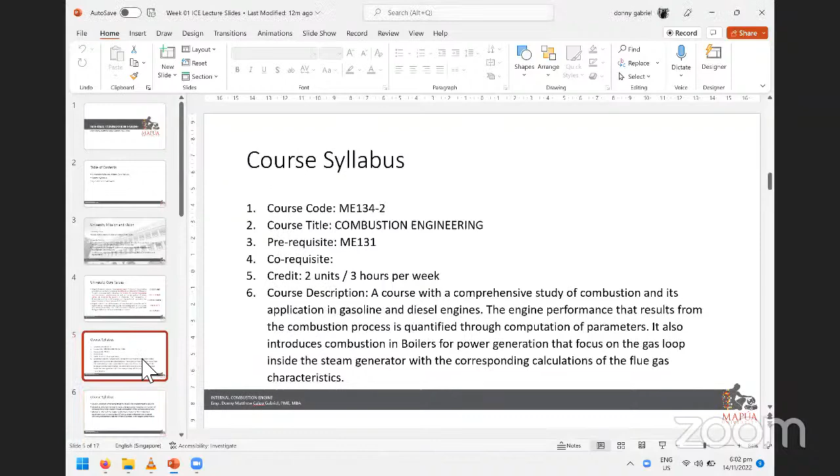Okay, so this is our syllabus. For 11 weeks, this will be our program. These are the topics that we're going to have. On week 5, we will have our module exam.

And also week 10. So week 5 and week 10 are our exams. The others will be just homeworks. Okay? Week 11, we'll just close out. So any other items we may have missed during the term, we will settle them all on week 11.

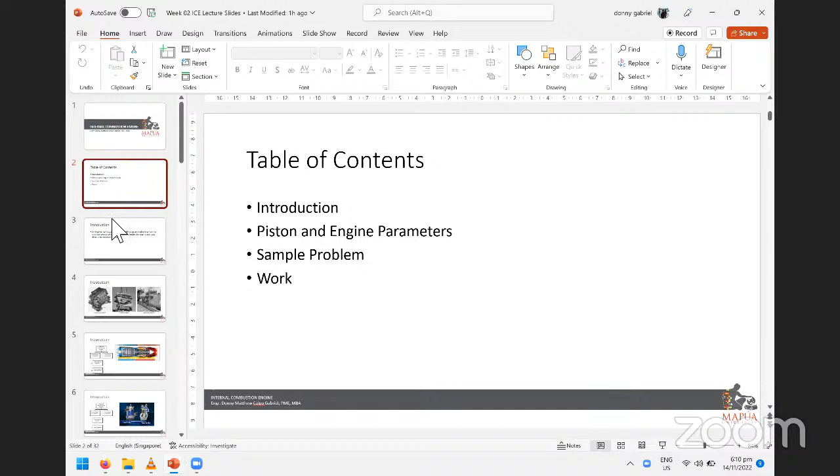So again, this subject is the internal combustion engine. An internal combustion engine is defined as an engine in which the chemical energy of fuel is released inside the engine. So there's a chemical reaction inside the engine, and that reaction produces energy, which is harnessed and used directly for mechanical work. That's the definition of an internal combustion engine.

There are also external combustion engines, but what we're focusing on is internal. Another example of external combustion is the steam train. Those are external combustion engines. But for our point of study, we will be looking at internal combustion engines.

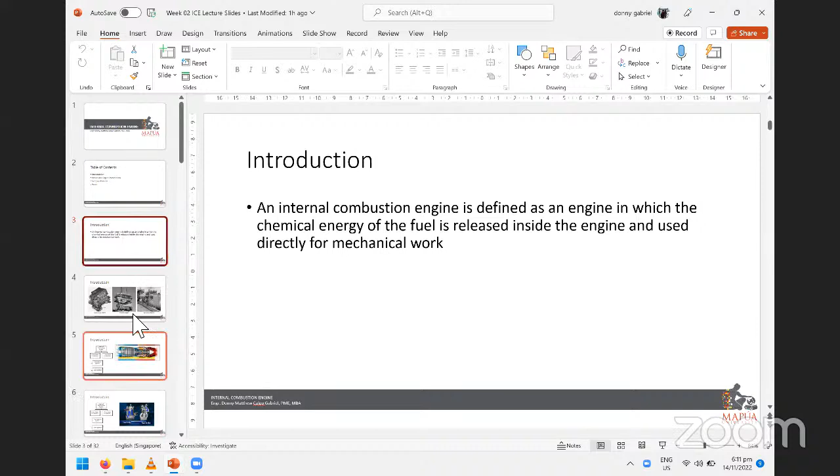Internal combustion engines are usually seen in automotive applications, so our cars still mostly use internal combustion engines now. Although we are shifting to a different mode of engine, right now it's still mostly internal combustion engines. We would also see these engines in ships, so marine engines, and also in generators, like in buildings—the large generators used there are internal combustion engines as well.

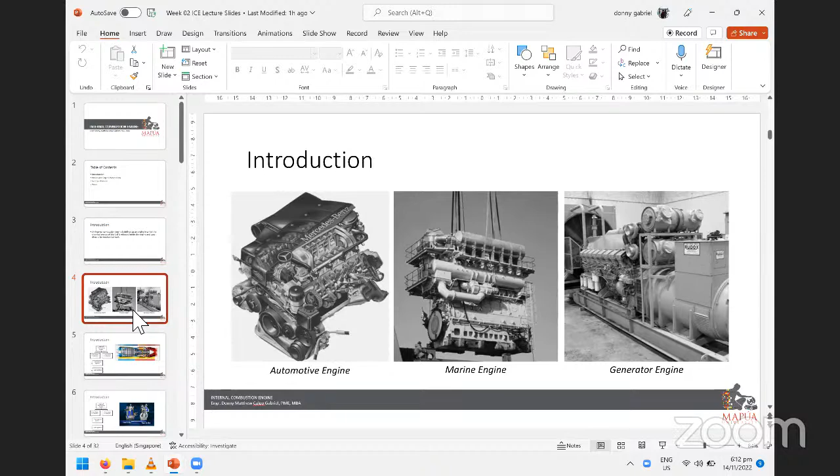There are two types of internal combustion engines: one is intermittent combustion, and one is continuous combustion. Continuous combustion means there's no gap—the release of energy and the combustion process are continuous. One example is the turbine or the engine of an airplane. They use internal combustion, but their combustion is continuous, with no stopping. What we'll discuss is the intermittent combustion engine.

Our focus of study is the intermittent combustion engine, which means there is a gap. The explosion or combustion process has a beginning and an end, and afterward there's a sequence where another part of the engine does the same cycle over and over again. So in intermittent combustion engines, there are also two types.

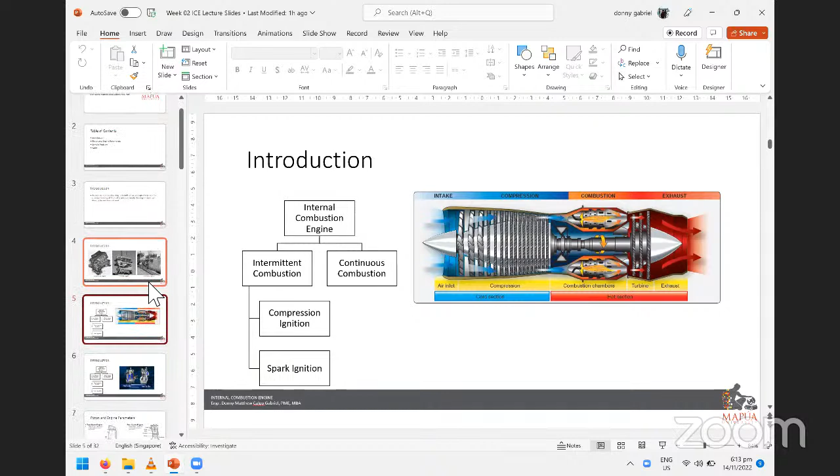One is compression ignition and the other is spark ignition. What does this mean? Here's an example of an internal combustion engine, the continuous combustion type. You can see here the time when it turns yellow—that is the combustion process.

So there's compression ignition and there's spark ignition. Compression ignition means that because you compressed it, a combustion process occurred. For the other one, you also compress it, but you introduce a spark plug or introduce heat—that's spark ignition. We will dive into that in more detail in our subsequent lessons, but for now our focus of study is internal combustion engine, intermittent combustion, and compression ignition and spark ignition types of combustion.

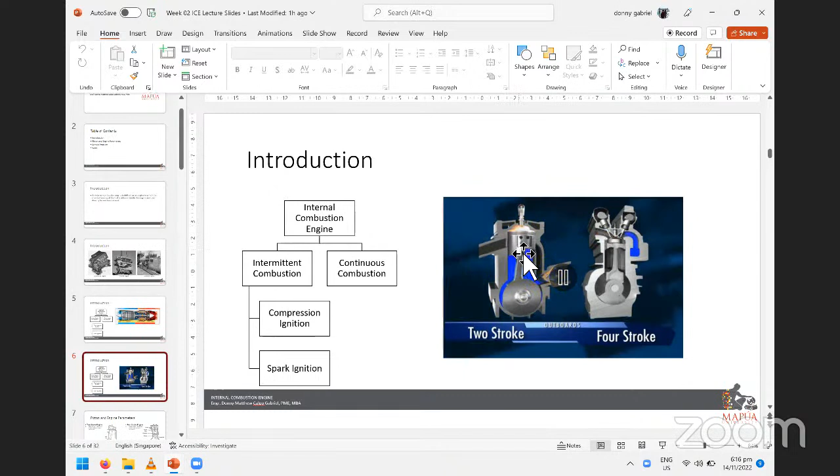Okay, let's define each stroke on the 2-stroke and 4-stroke cycle. So the first stroke, or stroke number 1, we will define as the intake stroke. This is the time when the air and fuel mixture enters the chamber. That's the first stroke. In the 2-stroke engine, the air-fuel mixture also enters inside here.

Second, the compression stroke. After the air and fuel mixture enters, the second stroke compresses the air and fuel mixture. You can see here on the first stroke, the intake valve is open, letting the air and fuel mixture inside the chamber.

On the second stroke, both valves are closed so the air and fuel mixture can be compressed while the piston moves upward. On the two-stroke engine, while the air and fuel mixture is entering the chamber from below, at the same time it's being compressed also. So in the four-stroke, two processes, one stroke one process. In the two-stroke, one stroke already has two processes.

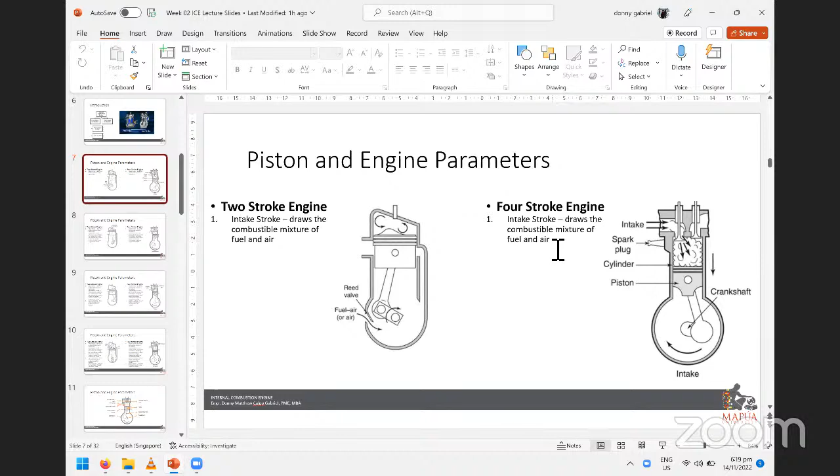Notice the processes of combustion are the same in the two-stroke engine and the four-stroke engine. Only the mechanical movement is different. Although the process is the same, only the mechanical movement differs.

You'll also notice, in the two-stroke engine, both the bottom chamber and the top chamber are being used. Let's go back to the moving parts. Notice here, in the two-stroke, the bottom of the chamber and the top of the chamber are both being used for the combustion process. However, in the four-stroke, only the top chamber is used throughout the combustion process. The bottom is not being used.

Question? None yet. All right, so we'll define each part of this chamber.

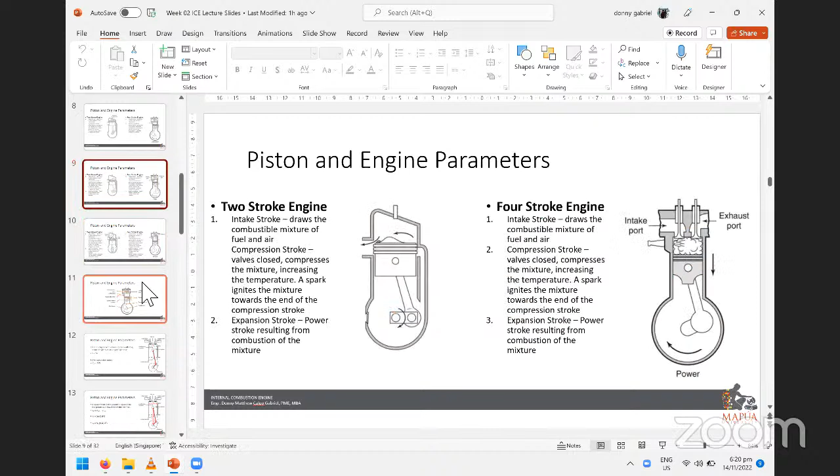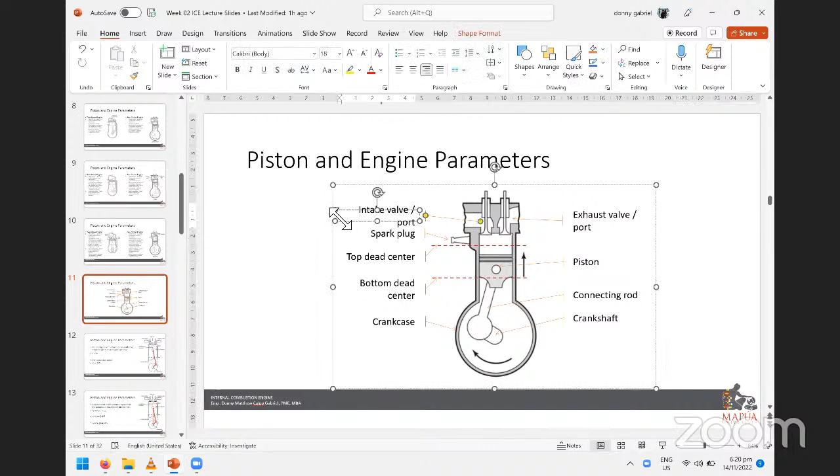Here, notice, this is the one we used. So we'll give it a name. This part, we will call the intake valve or intake port. This is where the fresh air and fuel mixture enters now. While the other side is the exhaust valve or exhaust port. This is where the used up air and fuel mixture is expelled.

You also have a spark plug here that provides the heat needed for combustion. And you also have what's called the top dead center and the bottom dead center. Top dead center means this is the highest point to which the piston, this moving part here, can go. And the bottom dead center is the lowest point where this piston can move.

Now, when there's an explosion here, there's a release of energy. It converts this energy into mechanical energy by turning the crankshaft. The expansion of the combustion process forces the piston to go down, and this motion, the piston going down, moves the connecting rod and rotates the crankshaft.

All of this, the piston, this connecting rod, this crankshaft, this valve, this spark plug, is connected into a crankcase. Question?

Wala naman po, sir. Wala pa rin. Okay.

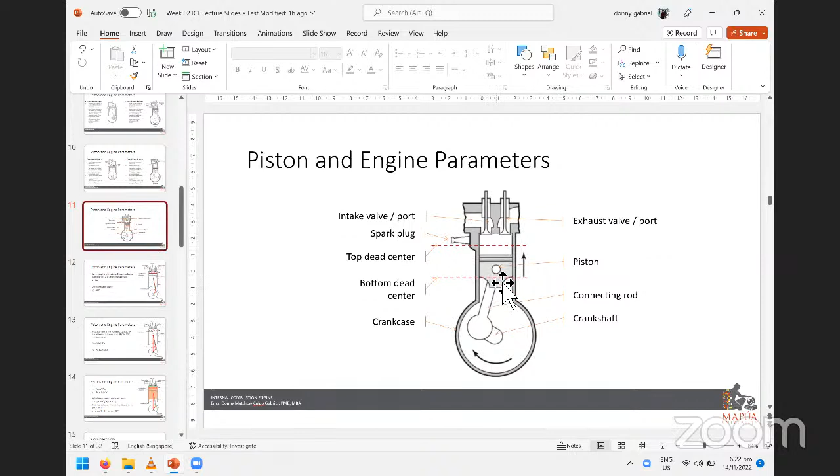The distance to which the piston moves from top dead center to the bottom dead center, itong distansya na to, is called the stroke or S.

So the average piston speed, denominated by UP, can be calculated by 2SN. Ano yung N? N is the engine speed, which denotes RPM, revolution per minute. Ulitin ko ulit: the speed to which this piston moves or travels is equal to 2SN, 2 times the stroke times the number of revolutions per minute.

This 2 signifies 4-stroke engine. Bakit 2? Kasi kung mapapansin niyo, balik tayo dito, ang N is denoted by revolution per minute. RPM ang N. Pag tinignan mo dito sa GIF natin, ito yung RPM, ito yung revolution.

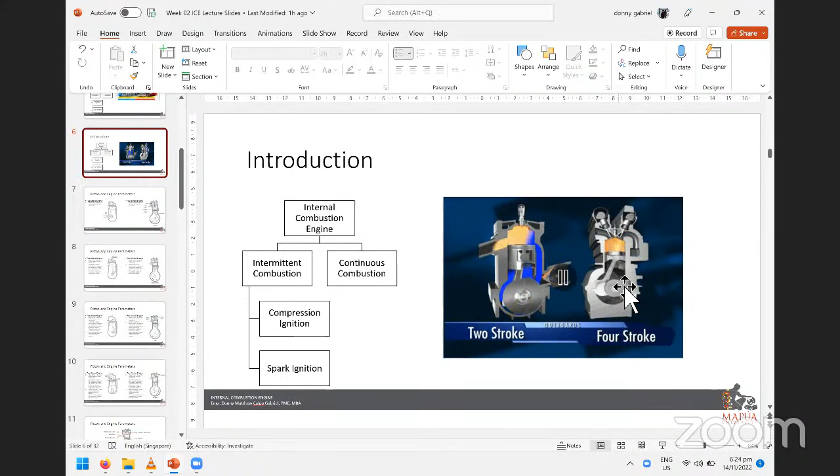Panoorin natin ulit kung ilang ikot siya mula doon ulit sa blue. Ang demarcation natin ulit is from the blue gas coming in. Ayan na yung blue, bilangin natin lang ang ikot. Isang ikot... 2 ikot bago ulit makaabot yung blue.

Balik tayo dito sa formula natin. 2 represents 2 revolutions of this crankshaft for 1 combustion process. This is applicable only sa 4-stroke engine because on the 4-stroke engine, you would need 2 revolutions of the crankshaft for 1 combustion process. That is not the same sa 2-stroke.

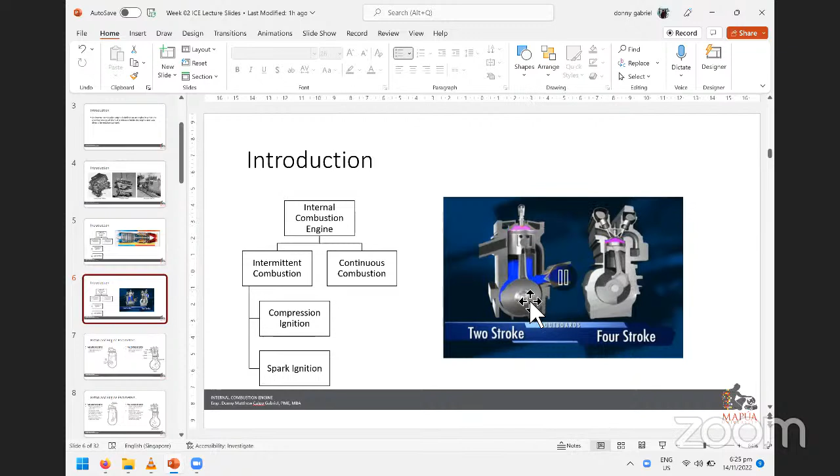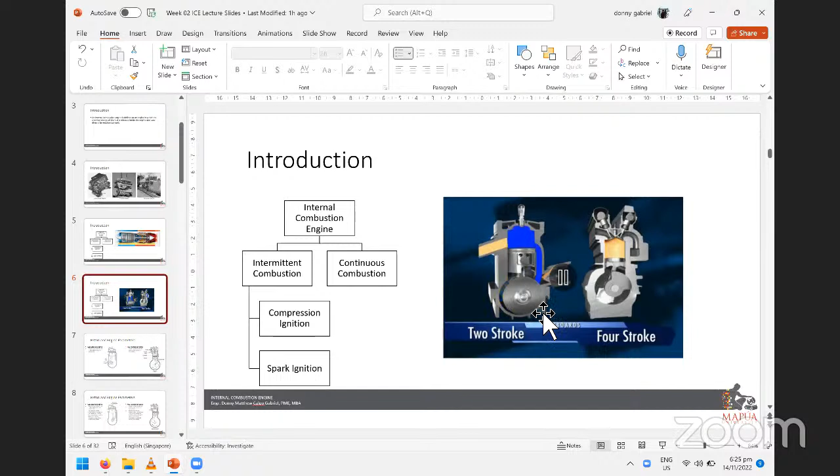Kung mapapansin sa 2-stroke dito, isang revolution lang siya. Tignan niyo sa pagpasok ng blue. Sa pagpasok ng blue, ayan, isang ikot lang, papasok na ulit yung blue. So sa 2-stroke engine, wala itong 2 na to. If it's 2-stroke engine, the average piston speed is just SN.

Na-gets ba? Naintindihan na? Or merong question? Walang question. Okay, tuloy tayo.

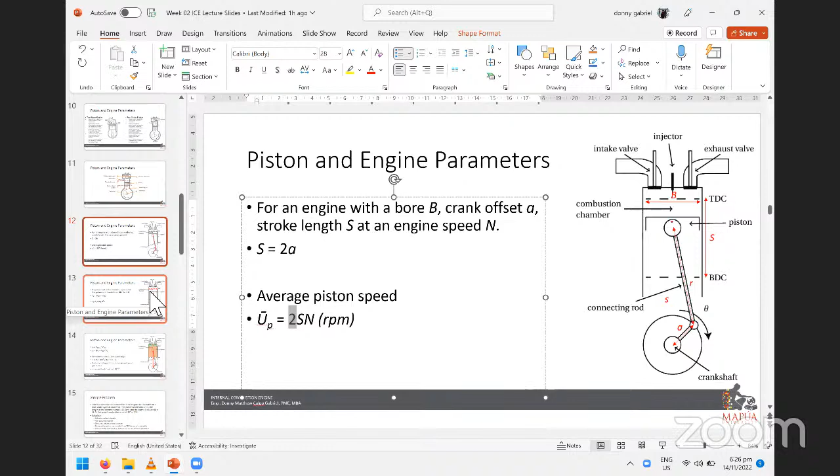The displacement volume is the displacement — displacement is the volume displaced by the piston as it travels from BDC to TDC. So when the piston travels from BDC to TDC, itong part na to, ito ang tinatawag na displacement volume.

Or volume displaced during the combustion process. So since yung piston mo, bumaba lang siya hanggang dito, from here to here, this will be the total volume of the air and fuel mixture that can possibly go inside your chamber. So this volume can be calculated as volume at BDC minus volume at TDC.

Pag kinonsider mo itong top portion na to, this is called the clearance volume. So if you have this volume from this top, TDC to top, and the volume from BDC to top, ito, the difference between that is your displaced volume.

You could also calculate the displaced volume by having the stroke, so stroke times bore, where bore is the diameter of the chamber. So the area of the chamber can be calculated as pi r squared, where r is bore divided by 2, times the height as stroke, S.

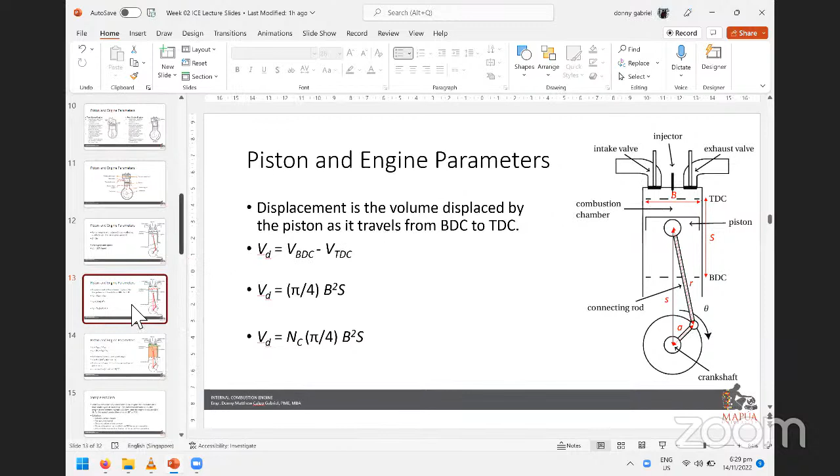So from this point of view, you can also calculate this. Parehas lang sila, no? Madiderive mo na yung bawat isa. You have your volumetric clearance, volume at top dead center, volume at bottom dead center, and volumetric displacement. With all this relationship, you will be able to calculate each parameter.

Another one is cylinder at any crank angle. Ito yung connecting rod mo, ito yung crankshaft mo. Sometimes this crankshaft will be at a certain angle. If that angle is given, you can always calculate yung volumetric displacement or yung volume at the chamber or at the bore with each specific angle.

The formula will be as is. Sa formula na to, ang hinahanap mo yung S, itong maliit na S na to, hindi itong malaking S, yung maliit na S. And using this formula to substitute to this formula, you'll be able to get the volume at each and every angle this crankshaft is making.

So example tayo. Sample problem. Anybody could help me read the problem, please?

Anyone? Wala? Okay, may lang po sir. Sige, Engineer Alcantara.

Okay, maraming salamat. So si John, meron daw siyang... sorry, subukan natin to. Hindi gumana yung lapis ko. Salamat Engineer Alcantara. So sabi dito, si John, meron daw siyang 3-liter V6 engine. SI engine, SI means spark ignition. Ayaw. Sandali lang, ayaw pumasok ng lapis ko eh. Insert, wala. Ay, naka-on ba yung Bluetooth ko? Yun, kaya naman pala. Kaya, subukan ulit. Ay, wala talaga, ayaw talaga pumasok yung lapis ko. Subukan natin yung panlapis, baka meron tayo. Ayun, pumasok pa sa lapis. Insert, draw. Okay.

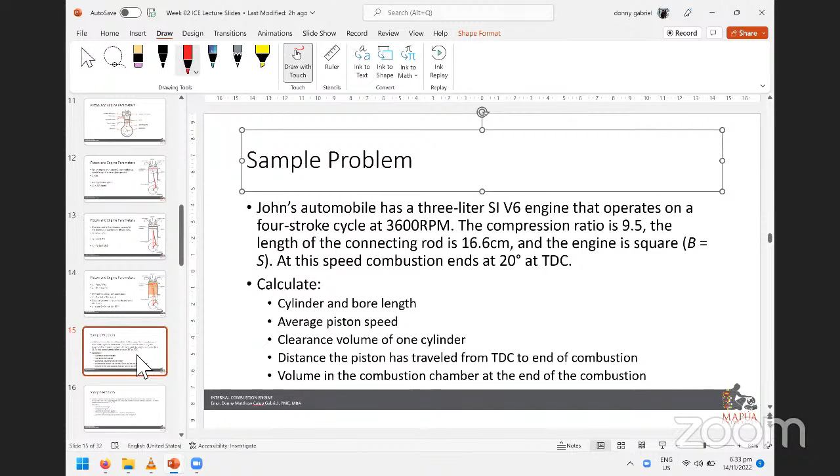So ito yung problem natin. Sabi niya, meron daw tayong V6 engine. Okay, V6 engine, so ibig sabihin yung Nc natin is equal to 6.

So we have a V6 engine here, so which means our Nc is equal to 6. So we have 6 cylinders, and these 6 cylinders have a total of 3 liters. So what is the volume for each cylinder? 3 liters divided by 6 is equal to 0.5 liters per cylinder.

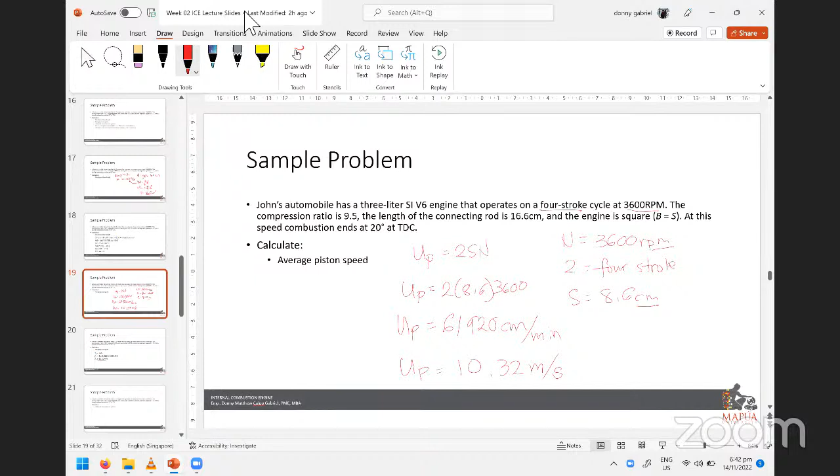So sa mga subsequent sample problems natin, sa mga homeworks natin, saka sa mga module exam natin, units are very important. So you do brush up on your units. Okay, next.

Ang next item natin ay clearance volume. So clearance volume, meron na tayong compression ratio na Rc is equal to 9.5. Ito, compression ratio. So makakalculate natin yung clearance volume natin by having our Rc is equal to, ano yung formula natin?

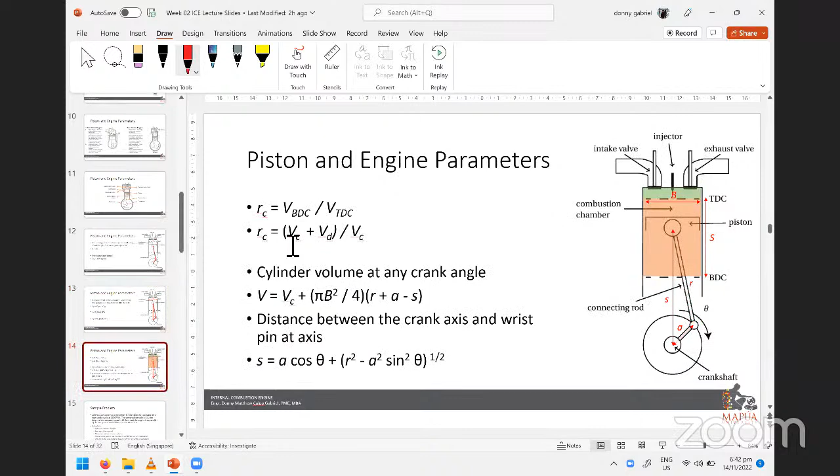RC is VC plus VD over VC. Meron na tayong RC which is 9.5. Yung VD natin is... sorry, not 8.6, displacement natin is 0.5 liters. So we can calculate VC. Bibilisan ko lang. So ayun siya, VC is equal to 59 cubic centimeters.

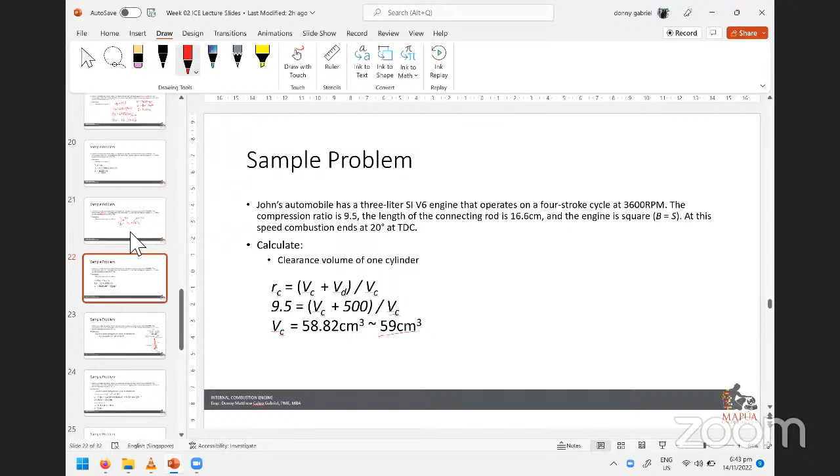So itong 500 cubic centimeters, saan nanggaling to? Conversion po, sir, conversion lang siya. Conversion lang siya ng 0.5 liters natin doon sa centimeters, cubic centimeter.

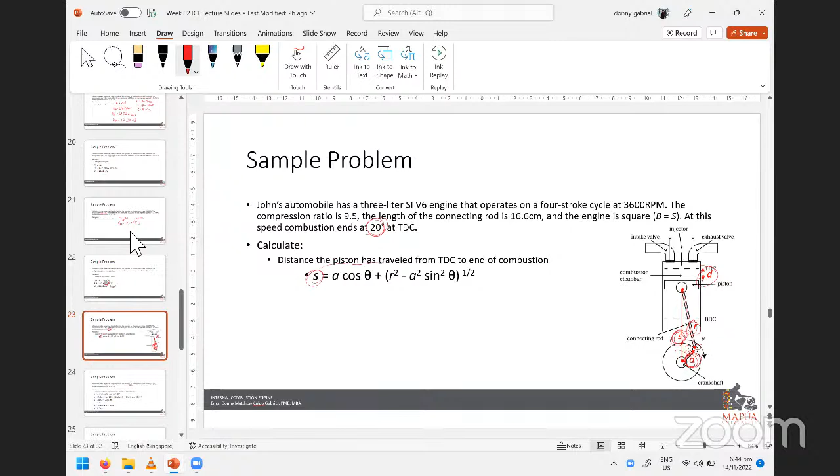So I'll continue on with the sample problem. Itong part na to, pag-aralan niyo na lang sa free time ninyo because I need to discuss work.

So pagka sinabi mong work is equal to force times distance, yung force mo pwede mong i-derive sa pressure times area times distance is equal to work. Itong distance nito, ito yung stroke. Itong area mo, makakalculate mo sa bore. Ito ngayon, tinatawag natin na pressure. Since sa loob ng piston, there are varying types of pressure or varying degrees of pressure, we will be getting the mean effective pressure o yung average pressure sa loob ng combustion chamber.

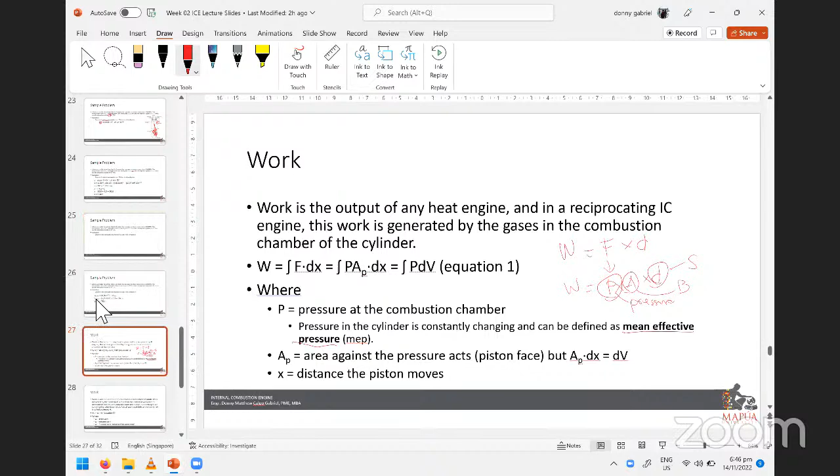Okay, question. Meron tayong tinatawag na brake, indicated, at saka frictional. Yung indicated, ito yung theoretical, ito yung available work kapag may combustion na nangyayari. Yung brake, ito yung actual, yung actual work that you were able to actually use. Yung frictional is yung parasitic loads or yung work lost into conversion. Halimbawa, frictional, halimbawa pumps, halimbawa auxiliary systems, those are called frictional or parasitic loads. Yung theoretical, ito yung work na galing doon sa combustion process itself. Yung brake, yun lang yung nararamdaman ng gulong mo, that is brake work.

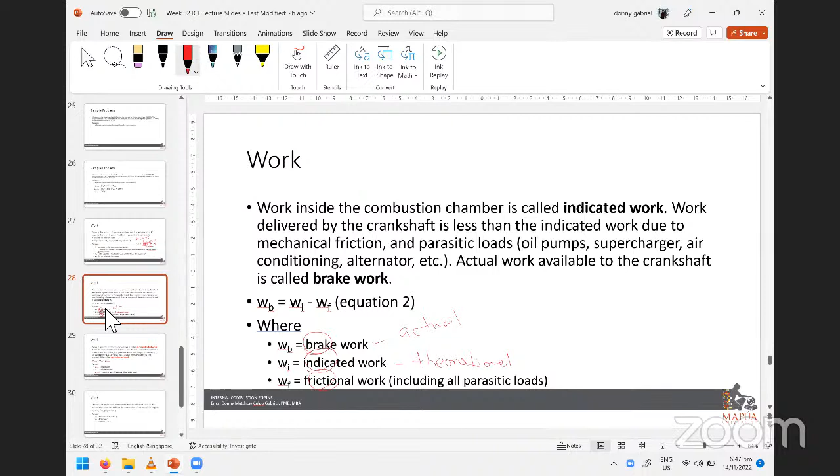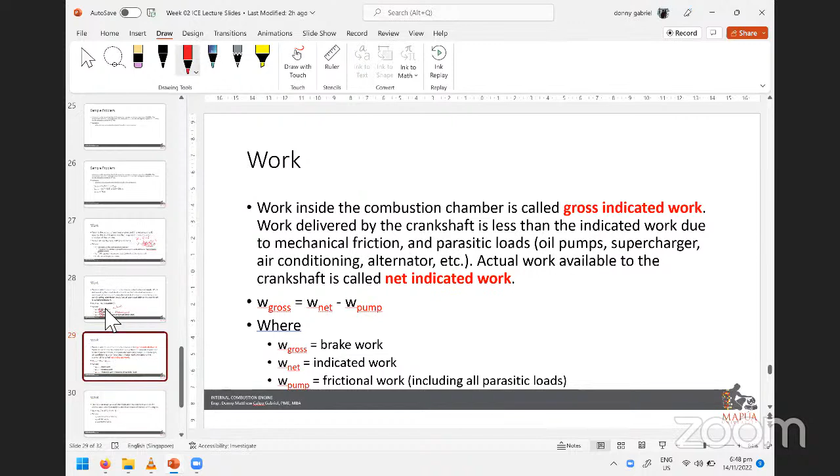Okay, so this brake work, indicated work, and frictional work can also be called or renamed as gross and net. So yung net o yung neto mo, yung lahat-lahat, ito yung indicated. Yung naiuwi mo, yung gross, yun yung brake. Yung pinamasahe mo, yung pinambayad mo sa ATM para ma-withdraw mo yung sahod mo, ito yung frictional o yung parasitic or yung pump load or work. Question? The difference or the relationship between the brake and the indicated work or pressure or whatever may be is called the engine efficiency. How much you can actually use versus how much is actually there is called the efficiency. So engine efficiency can be derived or calculated based on indicated work and brake work, their relationship.

Question. Question? Walang question? So if walang question, I will leave it here.